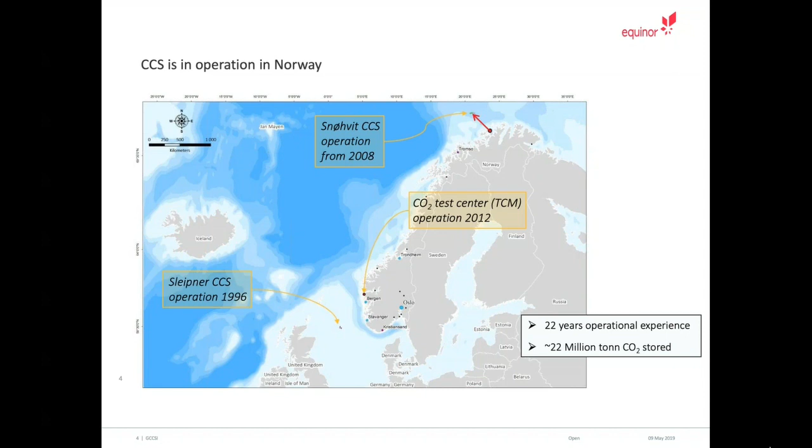This simple diagram and timeline shows some of the key activities within CCS that have taken place. TCM, as you can see, started all the way back in 2006, 2007. It was part of a larger project to try to establish CCS at a refinery at Mongstad in Norway. And it led to the formation of Gassnova, who is now the state entity responsible for the CO2 activities in Norway, whether they are research or implementation of larger projects such as Northern Lights.

The full-scale demonstration project is an initiative by the Norwegian government in order to realize a full-scale project that can drive technology forward and lead to a climate solution that can be applied not only in Norway, but in Europe and in the world at large.

One of the questions that we often get is, can we just do this? Can we store all these volumes? Will it not leak back up? We believe that the experience gained by more than 20 years at Sleipner and Snøhvit has given us a lot of confidence that this can be done. Our partners in this project, such as Shell and Total, also have experience from storing of CO2 and have similar experience there. The interesting thing here is that actually it gets safer over time.

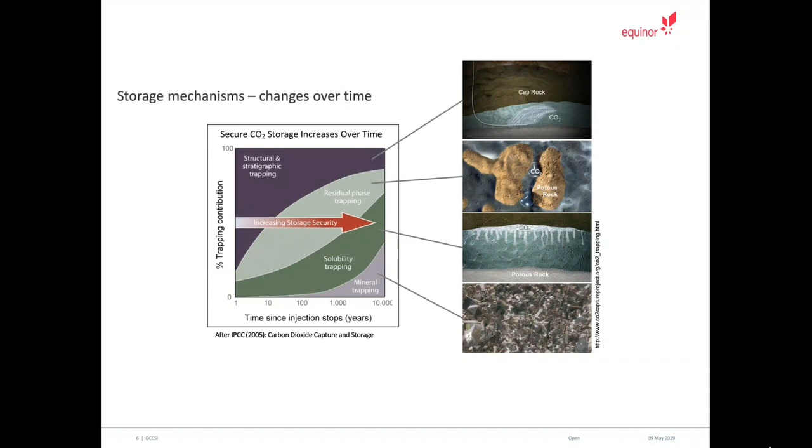No reservoirs are the same, so there is a lot of work needed to characterize and establish the suitability of each and every one of them. So we cannot simply start drilling. There is a lot of work to be done. And one of the things that we have been working on is to see what are the facilities that are best suited to utilize these underground reservoirs.

The initial feasibility study was made a couple of years ago, and we looked at the different alternatives. We looked at direct injection. We looked at utilizing existing facilities that are currently used for hydrocarbon production. And we looked at having an onshore terminal with a pipeline out, essentially similar to some of the hydrocarbon developments that we have, but in reverse. And the conclusion was that we would go for an onshore terminal with a pipeline.

The interesting thing about this concept is that we are then utilizing a ship to transport the CO2 from the capture site to a receiving terminal. This opens up for a very flexible concept, because ships can go more or less anywhere. And it allows for smaller polluters to have an opening for delivering their CO2. Putting in place pipelines from every point source would be extremely costly. Using ships makes this much more flexible.

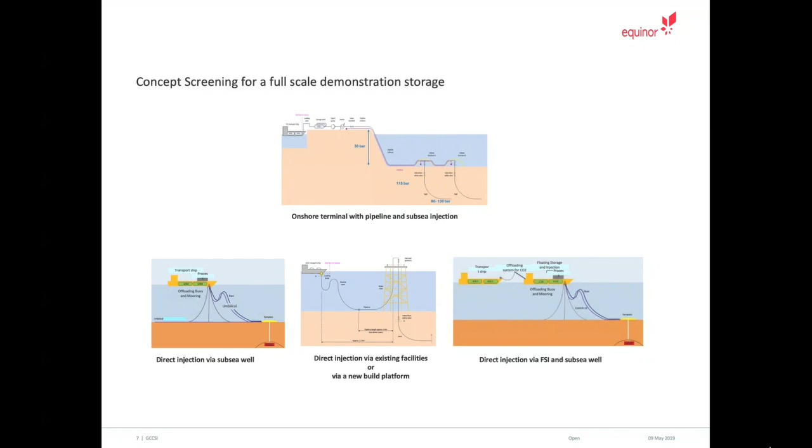This led to the concept that is currently in place for the Norwegian demonstration project. You have the capture plants. Currently, there are 2 capture plants being matured: a waste to energy plant at Fortum in Oslo, and Norcem cement factory in Brevik. Northern Lights as a project has the responsibility to pick up the captured CO2 using ships, transport it to the receiving facility on the west coast of Norway, and then safely deposit it underground, almost 3,000 meters below the seabed.

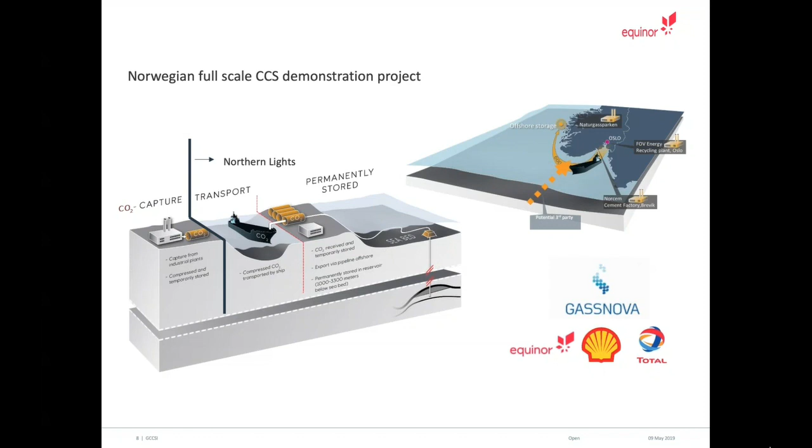There's quite a few differences. Equinor and the partners Shell and Total are oil and gas companies used to developing complex projects in the oil and gas industry. And when we do regular project development work, it's fairly well defined what we're working with. The resource being hydrocarbons, the market is existing. There is a market for oil and gas. There is a regulatory framework in place because oil and gas has been developed for well over 100 years. And the business case can be established, and the project can be refined through maturing through decision gates. And essentially, you can optimize and define the outcome.

When you come to a CO2 value chain, it's much more difficult. There is no market, obviously, for CO2 in this context. The resource is not really defined. We know that there are large underground reservoirs suitable for storing CO2. We know that there is too much CO2 essentially, but there is no business case simply because CO2 is a waste product. It has no value as such, and the cost for managing it is higher than the quota price established.

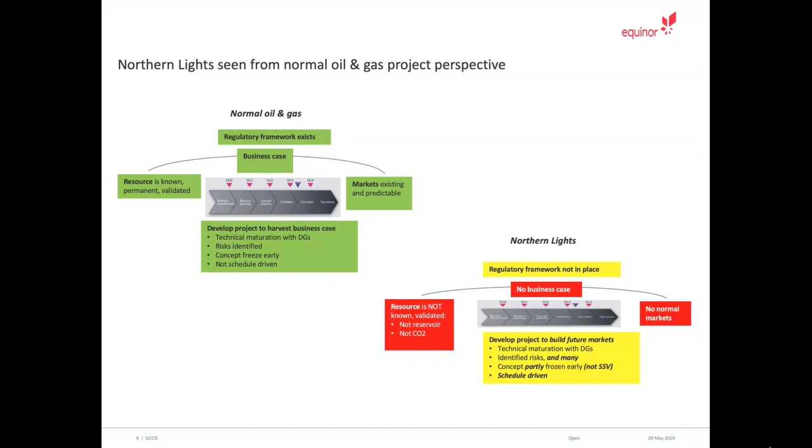One of the things that needs to be in place is a so-called exploitation permit. And Northern Lights received the first exploitation permit issued in January of this year. It's known as EL001 or exploitation permit 1 in Norwegian. And it is for a fairly large area south of what is known as the Troll gas field, west of Norway.

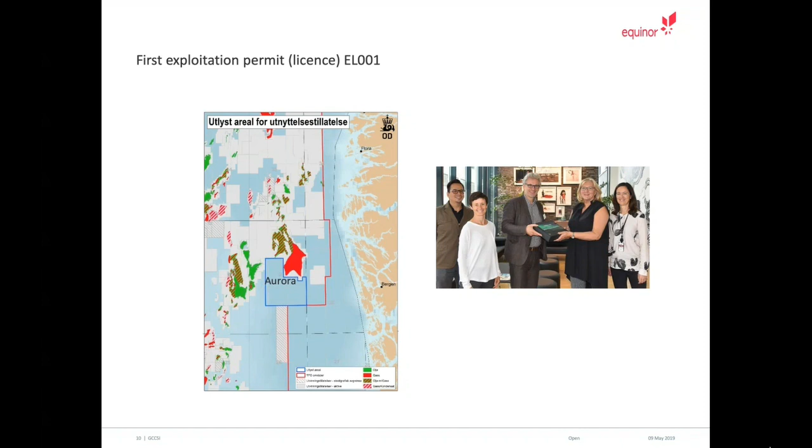And why is this huge area available in the North Sea, where you can see on the map that there are quite a lot of hydrocarbon fields? And the reason, obviously, is that this is an area with no oil and gas prospects. And when there are no oil and gas prospects, no exploration wells have been drilled. So there are no wells, and therefore limited knowledge and understanding of the subsurface.

As I said, there are no commercial CCS projects there. And what we are trying to establish is a first of a kind full chain project that should be commercial, and it will be based on industrial emissions. And it will have one storage that is open and accessible for multiple industries.

The alternative for the industry typically would be quotas, and the quota price simply is too low. And there are no other taxations or initiatives that drive this. So we need a public-private partnership where nation states come in to assist and bridge the financing gap. But it's also important that the model that is being established can be reused and lead to an industry, because we all recognize that for CCS to be part of the solution, there is a need for a fairly rapid ramp up in capacity and the number of facilities.

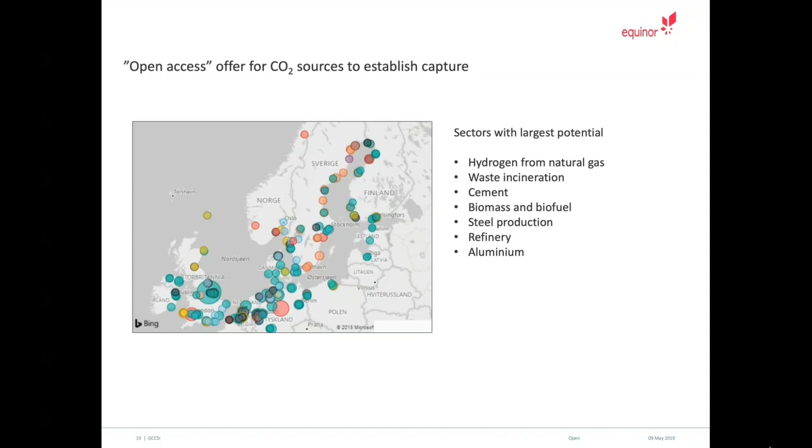However, the opportunities are there, and we have looked at sources that are located with access to sea because of the ship transport part of the project, and we see there are many, and there are many sectors that could participate. And we're actually having a dialogue with quite a few of the emitters shown on this map today.

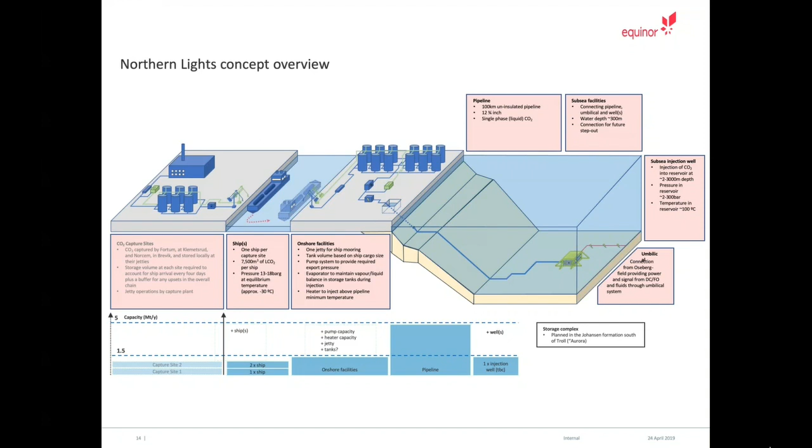There is a pipeline. The pipeline is one of the higher cost items in the project, and we have therefore selected a high capacity in the pipeline to allow scale up. And we can see at the bottom, if you understand my graph here, that we're trying to show the capacity of the various parts of the chain. And you can see that the pipeline has a capacity of 5 million tons, which is significantly more than any of the other elements in the concept. And then ultimately, there is a well where the CO2 is injected, and additional wells can be added as needed.

I mentioned cost. I will not go into the actual cost at this point because we are in the phase where we are defining the system and the associated cost. We have some initial estimates from the concept phase last year, and we see that the cost is distributed between the various elements of the project. And as you can see here, the onshore receiving terminal is one of the more costly items. Then it's pipeline, as I said. Subsea is the subsea facilities. There is the well, and there is the ship for transport, and there is some management on top of that, as there always is.

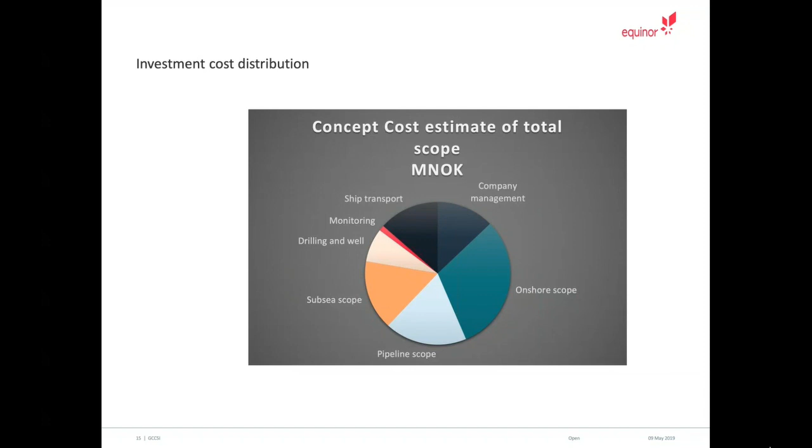There are some challenges with CO2. It's an interesting fluid or component to transport. It has 4 phases that we need to consider. It can be a gas, it can be a liquid, it can be supercritical, or it can be solid, dry ice. And for us to transport it in an efficient way, we need it to be in the liquid phase. The unusual thing there, of course, is that it can move from the liquid phase directly to the solid phase if we are unfortunate.

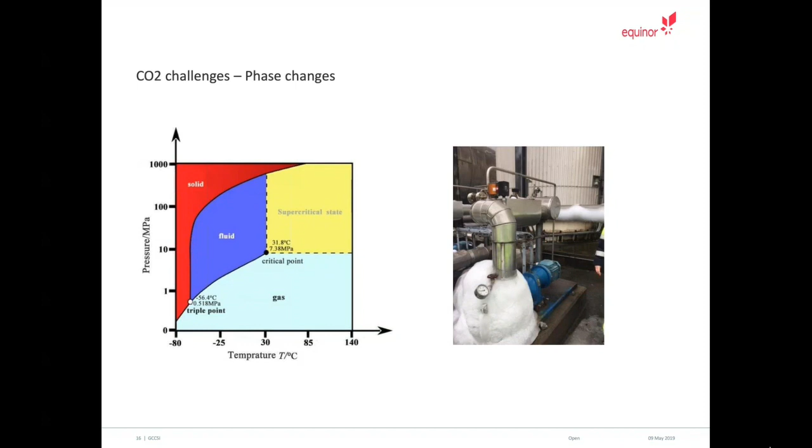And in our project, we actually have it in 3 of these phases, but we do not want a solid phase. So we transport it liquid, cold, and pressurized, and this creates some challenges. For this purpose, we have had to design and develop a specific ship solution. So this is the ship design that we're working with. It will transport the CO2 at a moderate pressure of 15 bar and minus 25 degrees typically.

This is comparable to what is being done today with CO2 used for beverages and so on. But those are much smaller volumes and much smaller ships. We need to scale this up, and we believe this is the largest size tanks and ship that can be used before we develop different transport conditions.

One interesting aspect here is that since this is essentially an environmental project, we have selected to go for a hybrid ship propulsion with LNG for the engines and batteries to allow the ship to operate on electricity in the near-shore areas. So that's interesting.

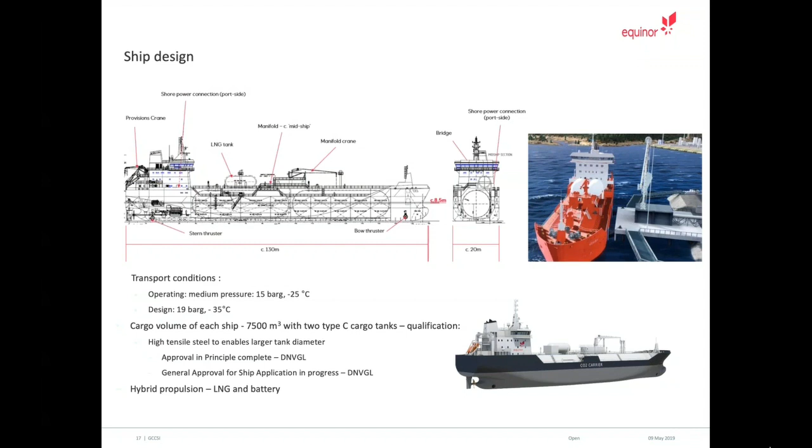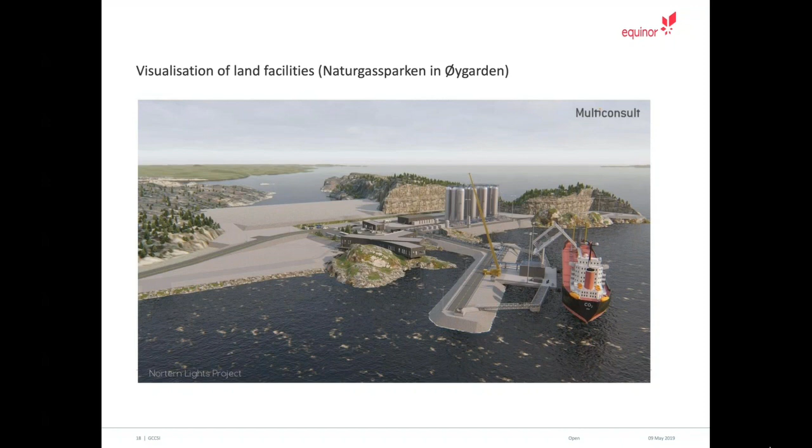Then we have the receiving terminal itself, west of Bergen in Norway. As you can see from the illustration, it is essentially jetty facilities to allow the ship to unload its cargo and tank volume for intermediate storage, and then some simple buildings for administration and so on. The west coast of Norway, for those who do not know it, is challenging. It has very uneven seabed.

From the terminal, which is on the right on this rather busy slide, the pipeline is the orange line going first north, which is up on this slide, and then left or west. All the other lines that you can see on this map are other pipelines or installations that already exist in the North Sea related to oil and gas developments. As you can see, it's a lot of activity in this area, and it's quite important that we coordinate with them in what we do.

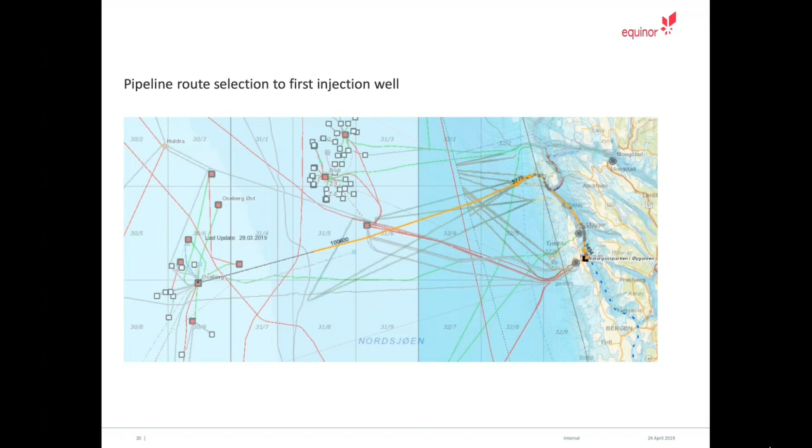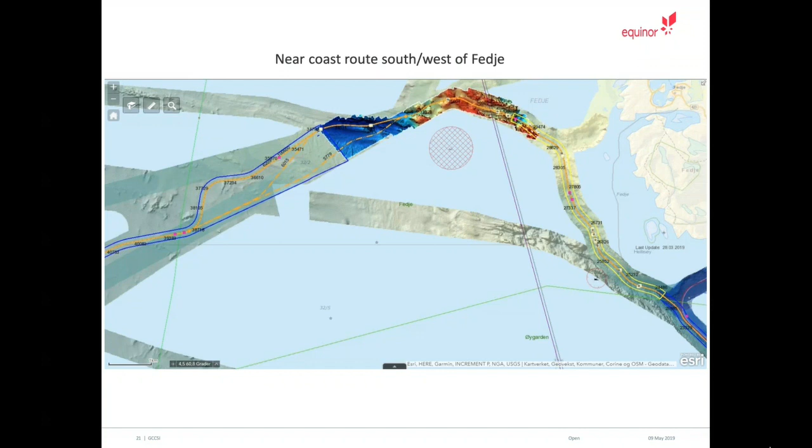Just to illustrate some of the interesting challenges we face, this is in the near-shore area, and it may be difficult to understand this, but the pipeline is the orange line, and what you see is the mapping of the seabed that we performed last year. It's a detailed map by ROVs, and there are some specific issues. The seabed, as I mentioned, is extremely uneven, leading to a need to install rock to ensure that the pipeline is stable.

We have a submarine, a German submarine from the Second World War, which was sunk in this location, and it contains large amounts of mercury, and we therefore need to be very careful not to disturb it or its immediate area. And of course, there are areas with corals that we are not allowed to damage. So these are some of the challenges we face in installing the pipeline itself.

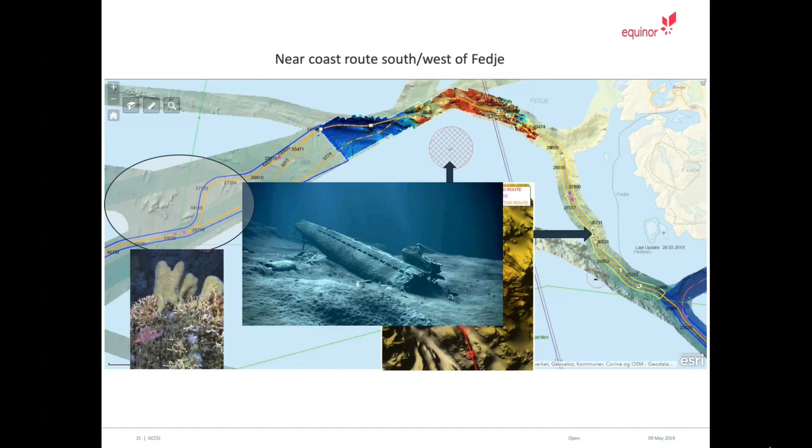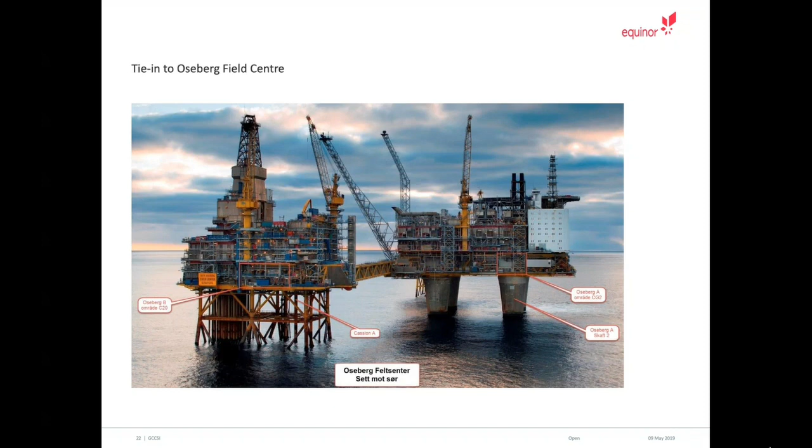Then we are also going to receive some of our utilities, such as power and control for the subsea development, from a nearby installation, and we need to do the necessary modifications and tie-ins to this as well. The subsea equipment looks like a small yellow thing on the map, but in reality it's a fairly large installation. This building that you see is the building that I'm sitting in now, and it's just there for scale to show the size of the first well structure.

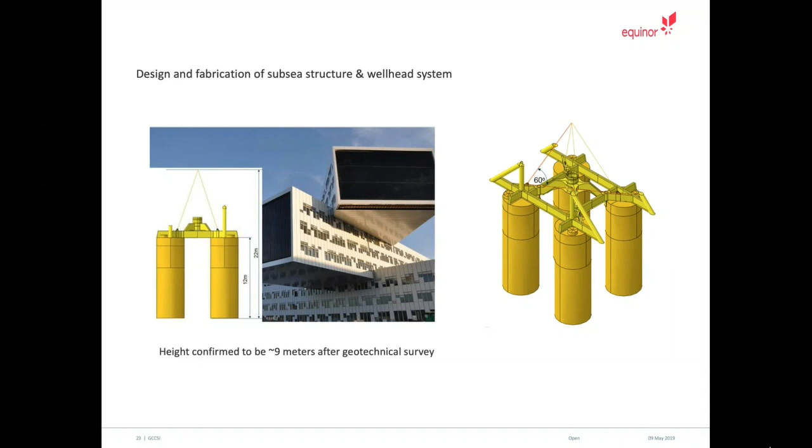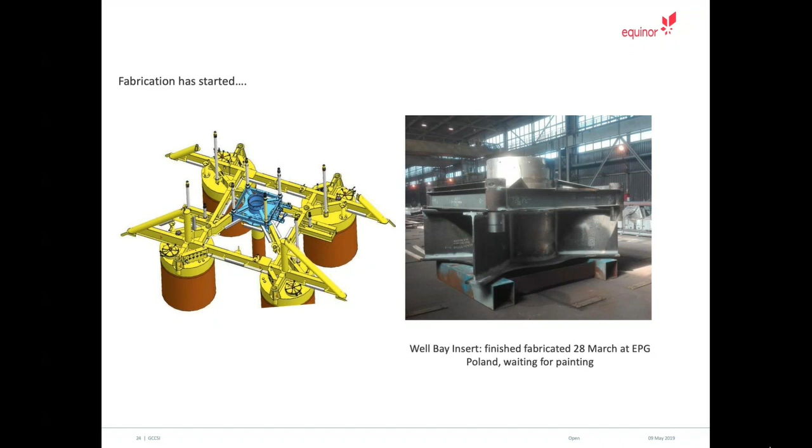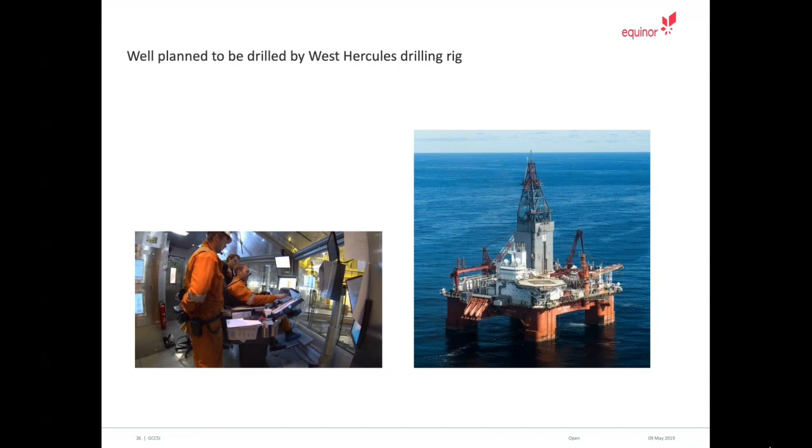The first CO2 injection well, which is also an exploration well to confirm that the reservoir is suitable, is planned to be drilled later this year using this drilling rig known as West Hercules. So that's one of the more exciting things that we're looking forward to later this year.

And then what is really needed to store CO2? Why are we drilling now? What we need is a place for the CO2 to be, and that means essentially what we call sand. In reality, it was sand originally, but now it's sandstone, which means that it's a fairly porous stone with pores that currently are water filled, where we will displace the water with CO2.

We need fairly large areas of this sand, large volumes, because we're going to store substantial amounts of CO2 in it, and it needs to have sufficient what we call injectivity, which means that it needs to be able to receive the CO2 and that it can flow away from the injection well.

We also need a shale or very tight rock formation above the sand to ensure that the CO2 does not migrate back so that it becomes a leakage to the seabed and then to the atmosphere. So this, what we call cap rock, is also needed. And of course, we need to be able to monitor what actually happens. We're not going to be running blind and just inject huge volumes of CO2 and hope that it stays where it should.

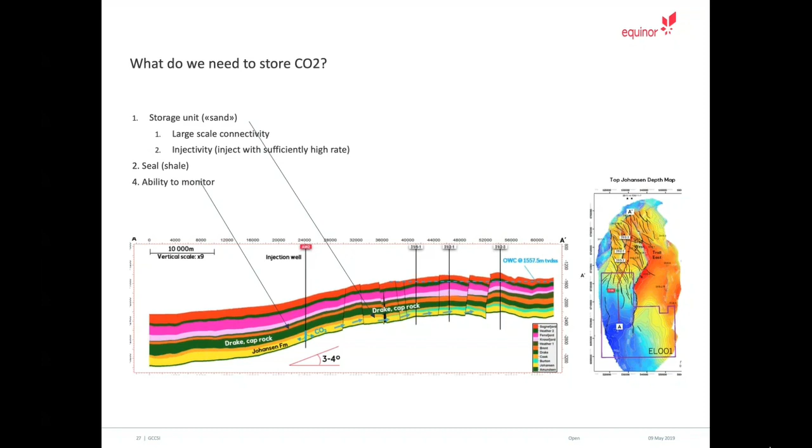Definitely not. One of the key things we are working on is the ability to monitor. And we have a strategy here, and it's simplified significantly in this illustration, where we will inject, we will monitor, and as long as everything is as it should be, that means that we can observe the CO2 where it should be, and it stays there, everything is fine.

If it behaves different from expected, we will have to see why. If we understand why, we may have to do something to mitigate it. We may have to change where we inject and so on. If we do that and everything is done as we expect, then it's fine. Should it not be, then we will obviously stop injecting. We will not inject if we are unable to predict and understand what is happening.

We believe this is quite doable. Our experience from Sleipner and Snøhvit indicates that this is something we can do with a reasonably high degree of certainty.

Then moving towards the end of my presentation, one thing that is interesting to observe, I think, and it's something that we have come to realize as we have been working on this project, is that initially there was reluctance with emitters to discuss going forward with projects to look at capture, because there was no storage available, and storage is beyond their competence and beyond what they want to get involved in.